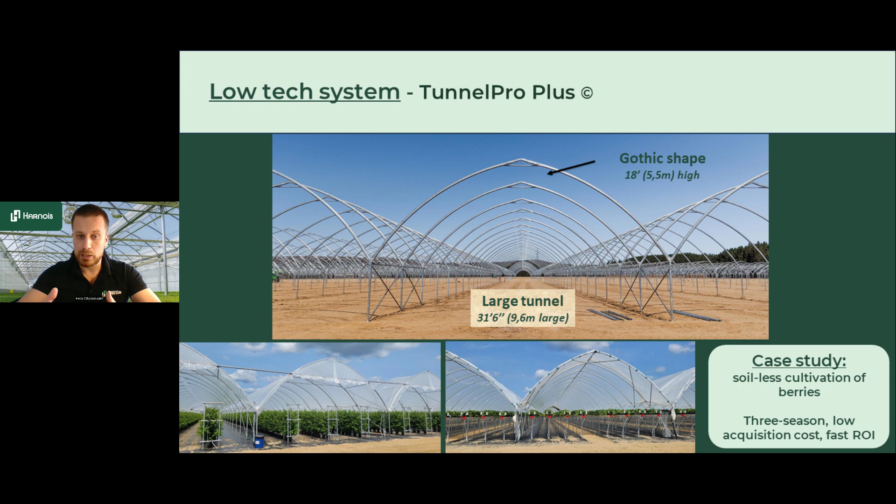Like you can see here, big width, gothic shape. I will explain why we use gothic shape. But at the end, what we see is mostly for soft fruit, but we see a lot of growers using high tunnel technology to be able to grow and improve, and also to use the geometry of the greenhouse to be more performant.

When I talk about geometry, what's very important to see, and you'll see it for each type of greenhouse today, is the air mass volume, what we call the buffer. This is important because without any technology or equipment, just the geometry and the air mass volume helped create a buffer. Keep in mind that hot air with humidity is less dense, so it rises passively. Having a pretty wide and pretty high greenhouse just helps physically keep climate uniformity at crop level. It's very simple, it's very low tech, but this helped a lot.

When I was working in Vietnam and Singapore, we were using very tall greenhouses with other technology, but just the type of greenhouse was helping a lot to have smoother variations and to keep the humidity and hot air more in the upper position, as you can see here, combined with passive ventilation.

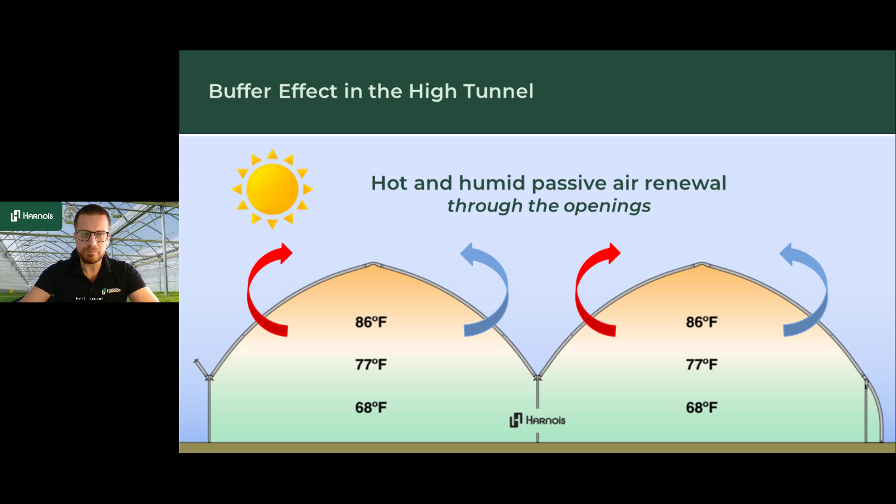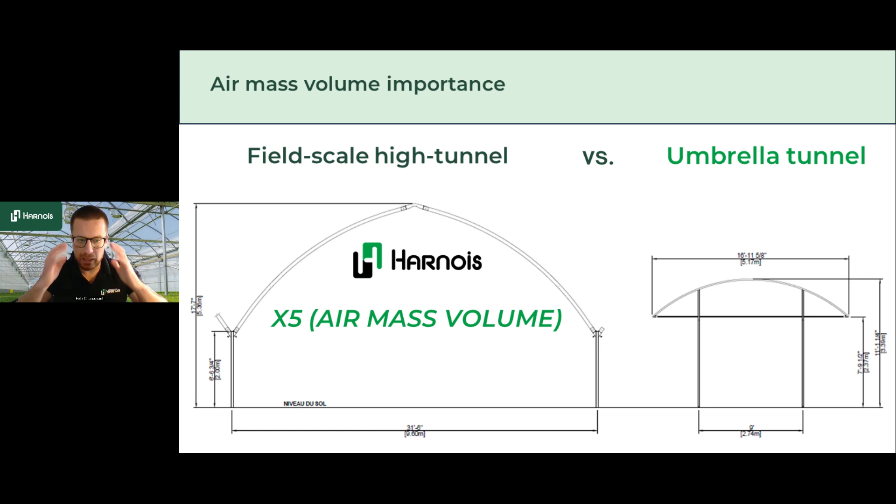So this is a first example of a lower tech system. Going back to the previous slide, you also see other types of tunnels, smaller mini tunnels, but like the one we designed here, which you'll see in the concrete case on the next slide, we wanted to have 5 times more air mass volume. This was one of our focus areas in engineering, because agronomic performance was directly correlated to the air mass volume. So let's go to a concrete example.

This is the first project we started last year. At the same time of year, the snow was starting to melt and they started construction. We started with the first phase with Pitre, which has about more than 300 acres of open field cultivation. It's a pretty young company, about 5-6 years in business, but very innovative.

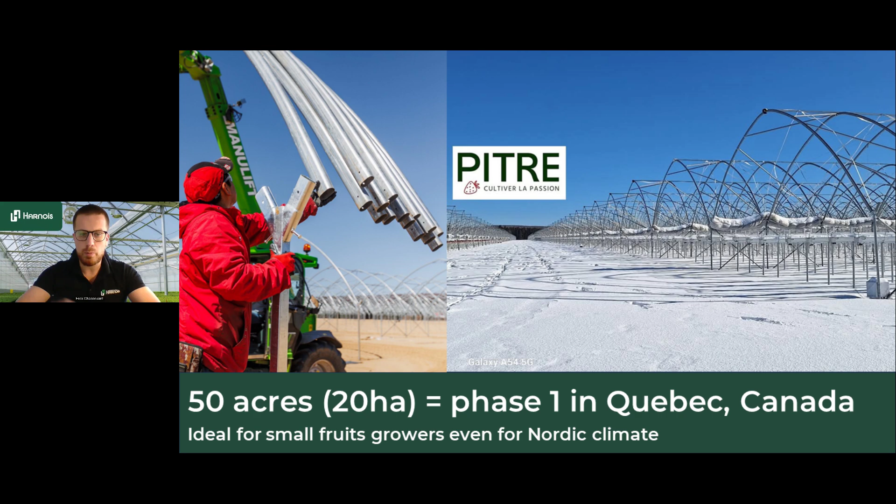They wanted to use a high tunnel to switch from open field cultivation to soilless growing method with drip irrigation, new technology, using our greenhouse to be much more resilient, starting 1 month before everyone using just the greenhouse effect, the volume, and the protection. Then by using innovative growing systems and innovative poly to play with UV for pollination, and also UV for the colors and conservation of the raspberries and strawberries. This is a concrete example of this lower tech trend.

And if you see on the next slide, it started to get big. This is just the first phase we completed last year.

We also work with suppliers with their own expertise, like Dubois, providing a very accurate, precise irrigation system because water is important. One of the main objectives of this is also to reduce inputs. Having a very precise drip irrigation system, the point is you also protect your crop and your fertilizer. When you have a very strong rain, for example, you reduce the risk of leaching. So this is very effective.

Even during a drought, when it's very hot, you can just open the poly. We have wide ventilation up to the ridge, protecting the crop because it can be very sensitive to hot air and humidity. So it's flexible, it's not high tech, but this helps. You'll see on the next slide it can double the yield, protect, and significantly reduce inputs. When I say inputs, I mean water, but also chemical application. So it's not chemical free.

The main goal is to be as organic as possible, but it's pretty hard with the berries. The main idea is to have a very good growing system so the plant can protect itself from fungus attack. For example, UV open poly can help reduce fungus contamination. The main idea of the system is also to use less chemicals and less fertilizer while increasing crop density and yield.

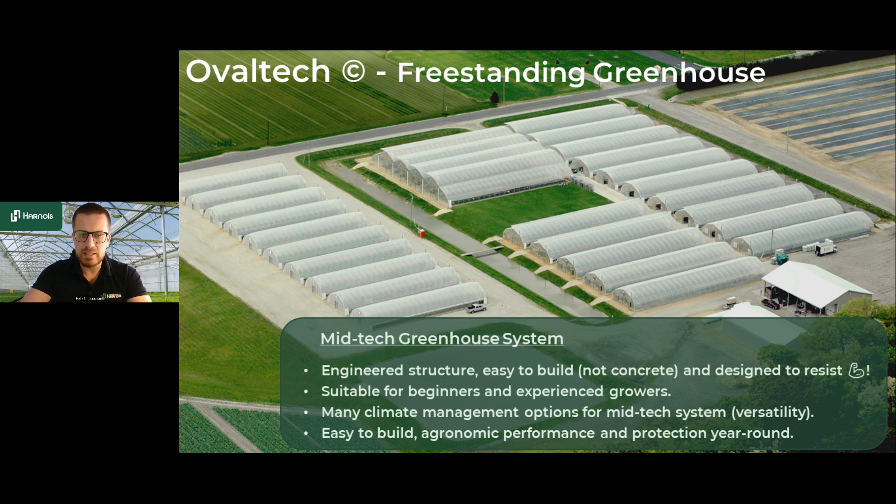The next slide shows a freestanding greenhouse, more of a mid-tech greenhouse system. Here in the pictures it's a complex of freestanding greenhouses, and we also have some gutter-connected ones on the top central. In short, a mid-tech greenhouse system involves more equipment integration and much more possibility to manage the climate with equipment—we start to talk about climate control systems, greenhouse control. So you'll see the differences, but this is the next step after the high tunnel, and then we go to mid-tech.

It's still the same regarding the buffer effect. I like to use this slide to show you, especially with freestanding greenhouses, that the volume is lower than a gutter-connected one, so you have to manage the hot temperatures in the air. That's why we use wider, taller greenhouses, especially for vine crops or cannabis, because they have very high photosynthetic activity and a lot of evapotranspiration. You need to be able to manage it, or you'll have issues with fungus and other contamination.

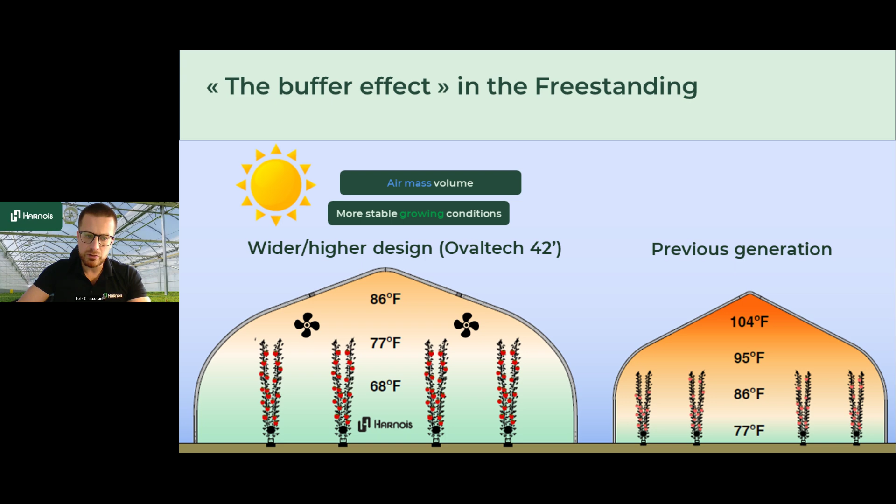Another slide to quickly show that we also consider this in our new generation of greenhouses—climate uniformity is very important. We want climate uniformity, less variation in temperature and humidity at crop level.

When we talk about mid-tech, we start to see more equipment: air circulation, HAF, VAF, irrigation—drip irrigation, sprinklers, irrigation booms, growing benches, soilless systems. We'll start to see more equipment, including motorized roll-up systems on the side and on top.

This type of greenhouse can be used year-round, unlike the lower tunnel I showed before—especially where we have snow, like in Canada's northeast, we need to uncover the high tunnel. Here it's designed to be much more insulated, enabling growers to grow year-round. The difference is we use only essential equipment. It's just another step regarding equipment in CEA.

But we can use it to grow many crops.

I will focus more on the mid-tech greenhouse system because it's more efficient, and also on the high tunnel. Here it's designed to be much more insulated and able to let growers grow year-round. So the difference is we use only essential equipment—it's just another step regarding equipment in CEA, but we can use it to grow many crops.

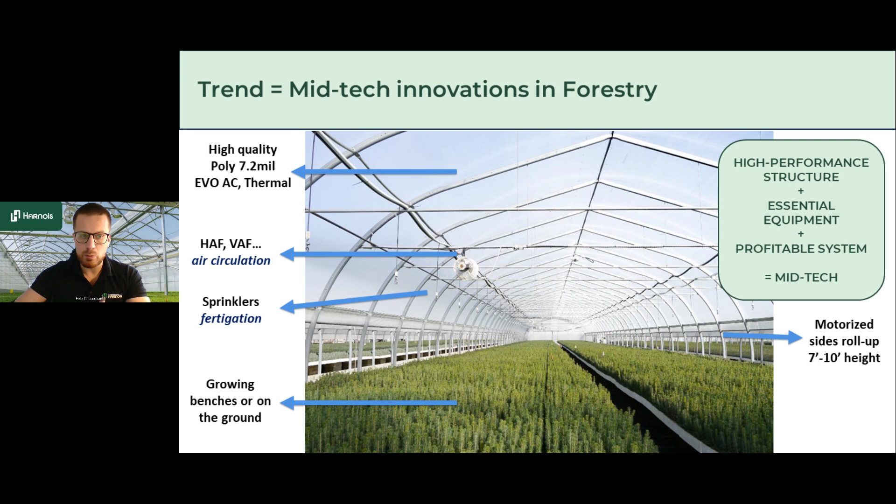In this example, CEA is sometimes thought of as more for fruit and vegetables, but I like to also include crops like tree seedlings, because in Canada we see a lot of requests for more automation and mid-tech systems for young tree seedlings.

So this is an example of a project we are building right now, but it will be finished next month. What you see here is a gutter connected system. We have two main growing areas, and we use part of the greenhouse for a technical area where we put technologies like the seedling machine with Ellepot. Biotherm, a Californian company, is also here working on the hot water heating system on the ground.

I like to use this example because before, when they were using the greenhouse, it was more low tech. And what we see, and the request from the growers, is the struggle with labor, the struggle with tree seedling germination loss and young tree loss. So they wanted solutions.

They cannot have good laborers as before, and they have to grow more because in Canada, in Quebec and here in the Maritimes - this project is with the government, with the province - there is a deficit of young tree seedlings. So they wanted to use a technology, not fully high tech, but a mid tech solution, to be much more efficient and answer the need to grow more.

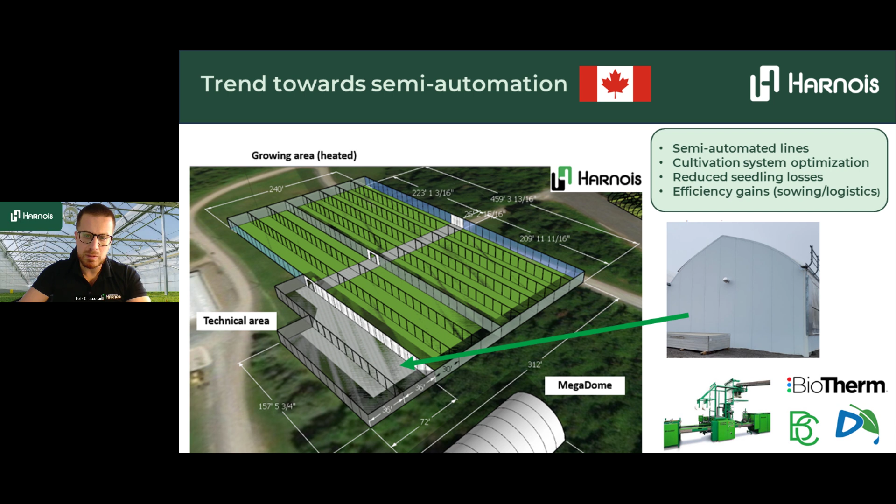So you see here we start to use semi-automated lines, cultivation system optimization, to have gains and to be more productive.

To be more productive, we work with partners, and here we work a lot with Blackmore companies, and they use air trays. It's a simple technology, but it looks simple while actually being quite complex, because it has to be scalable, and it has to be easy for forklifts and systems to manipulate inside the greenhouse.

With this system, it's easier to move the trays because everything is grown in trays, so you need less labor. It's also more efficient to place. And from the agronomic standpoint, it helped develop better roots and decrease the loss of tree seedlings.

So it's a solution helping first with manipulation, logistics, and operational efficiency, and from the agronomic standpoint, you get more consistency and better trees. The main idea is one seedling equals one tree, better root development, and moving the plants to the people, not the people to the plants.

Instead of adding new processes, the main idea was to simplify and use a mid-tech system, because we still have people handling things. We have transplantation lines, but we still use people to drive the lift. Just this helps a lot with overall nursery efficiency.

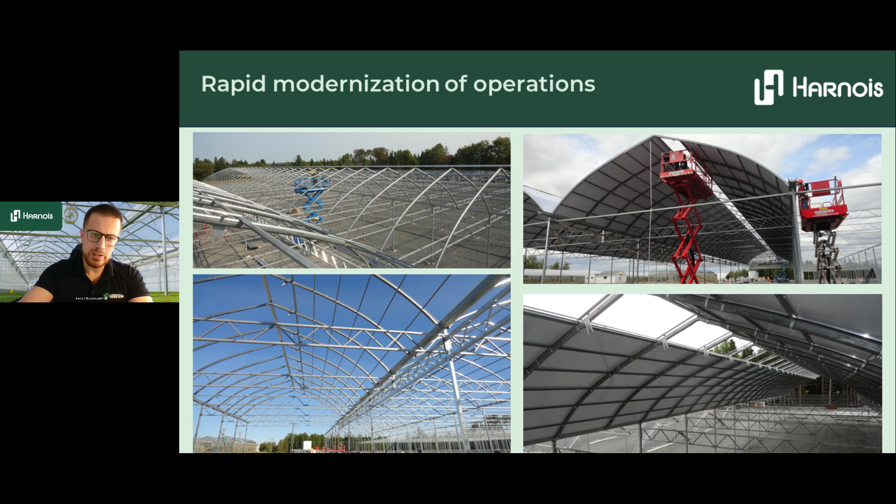So this is an example of a mid-tech system: passive ventilation, shading screen, thermal - basic equipment, I would say. But we start to see climate control technologies and a first level of semi-automation.

Another project I like is this one in Guatemala. We were working with leafy greens growers. Leafy greens in Guatemala, if you are in the highlands, the climate is great - colder at night, not too hot during the day. So you do not need a lot of complexity.

They were growing in the beginning using timber greenhouses. It was working - this is how they scaled up, starting with the first block, making mistakes, and then improving.

But what we found with this client is that in order to get more consistency and uniformity on the yield, especially on the lettuce weight, it was very important to first use a hydroponic system, and to have the right climate and the right use of equipment, the volume of the greenhouse, the orientation - without spending too much money.

Because here labor is easy to find, they don't need any heating system, and they don't have a lot of pest pressure. So in the mountains, the location is ideal. But they just wanted us to help protect the crop, have uniformity, and scale up, because when you work with big supermarkets, they want every time the same - 150 grams per head of lettuce.

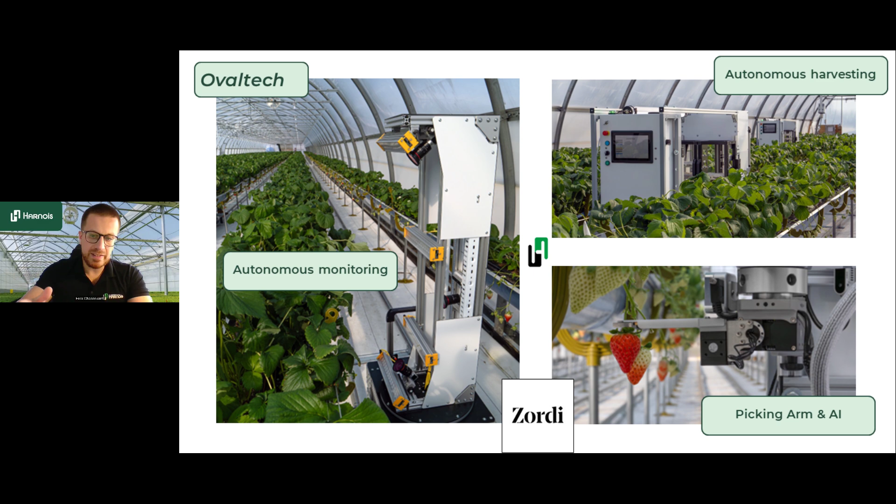Right now, if you check the top right, this robot can pick about 300 strawberries per hour. That's a good number, but they're working very hard to be quicker, and to make this technology affordable for growers and new people to be able to access it.

Another example, some more detail, but it's auto-grow mode, driven by data. This is why I like to use this technology, because it's more high tech - the latest technology is there, like artificial intelligence. They work with NVIDIA on low cost cameras. Low cost is important because they don't want technology only one or two growers in the state or Canada can afford.

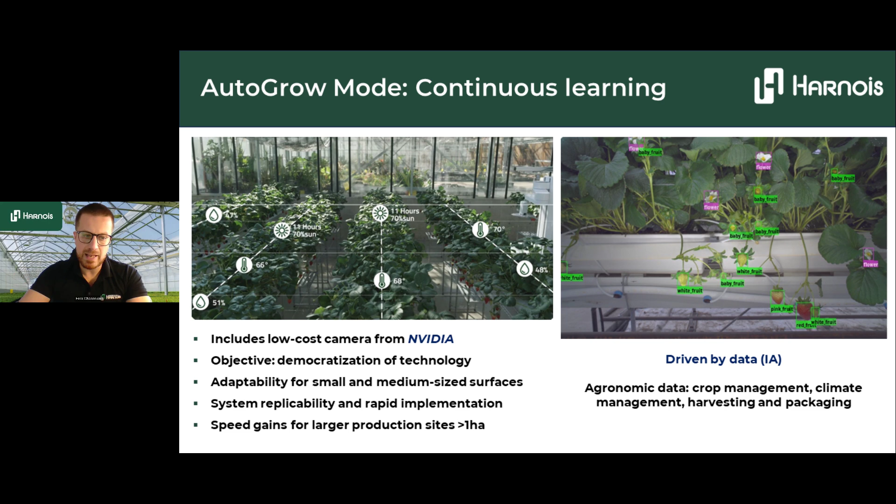So the idea is to be able to have scalability and to have this technology, real technology access with mid-tech greenhouses, and to work on the system replicability. We are just doing more projects right now. They want to scale up to use more greenhouses, more robots. So it's very exciting, and I like to use this example as a good transition.

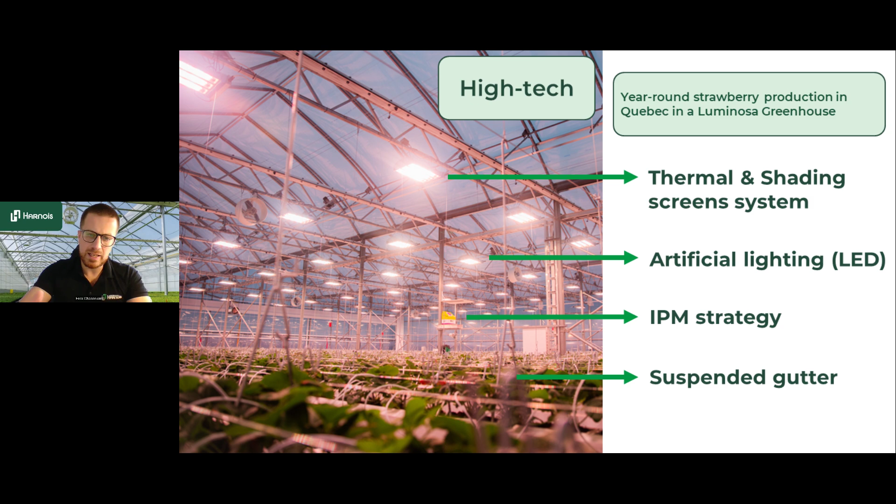Another project we are doing in Canada, but still higher tech. And when I say high tech, you start to see more complexity, more technologies regarding the artificial lighting system. This one is in Quebec. We work with Hort Americas on the lighting, and it's one of the most productive - not a big project, but one of the most productive strawberry cultivation year-round in Canada.

So they produce very delicious strawberries, hybrids, very good quality, with the gutter connected technology and the use of LED lighting. We see also more and more dynamic spectrum technologies.

So I am pretty good on time. The next example, I will say the very high tech, one of the most innovative greenhouse systems and greenhouse projects I will talk about right now.

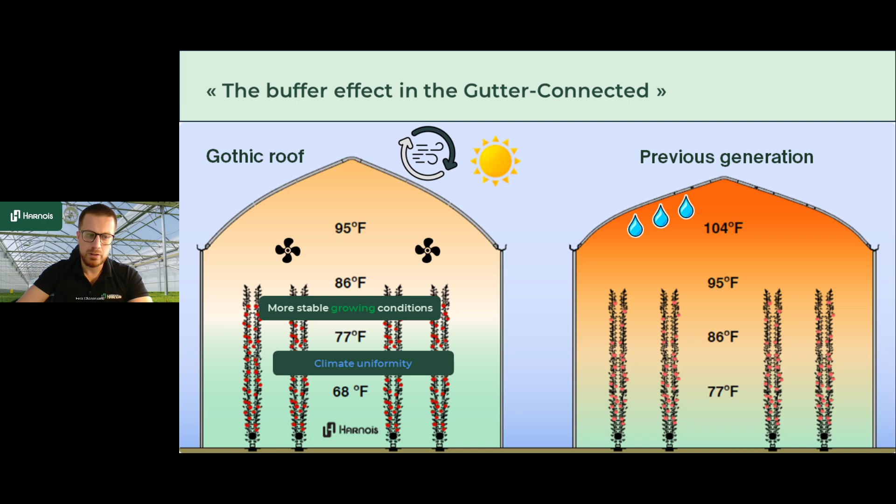So if I go back to the glass house, it's the trend, and what we see - we are seeing it in Mexico for years. In Mexico, it's 50 feet wide, 23 feet high, more than 6 meters high. So in the Vermax, we see it even in Nordic climate, and this is the first point, to be able to grow, and then we integrate the higher tech equipment.

So we do strata-based climate management, micro management of the growing zone. So this project is for leafy greens.

So leafy greens, it's evolutive, especially when you use a mobile gully system. So while the lettuce grows from post-germination to the final mature stage, the light level, the climate, everything will adapt. So this is what we are doing here.

So it's smart lighting pattern, more efficient misting system, the climate control. We work with the VPD diff directly - the air exchange, but directly close to the leaf. So I will explain it on the next slide, but it's much more accurate, much more precise than a lower tech or mid-tech system.

Insect-proof mesh can be removed. Of course, it's more like also semi-closed, positive pressure, or fully sealed. So this type of system is more connected and integrates a higher level of equipment.

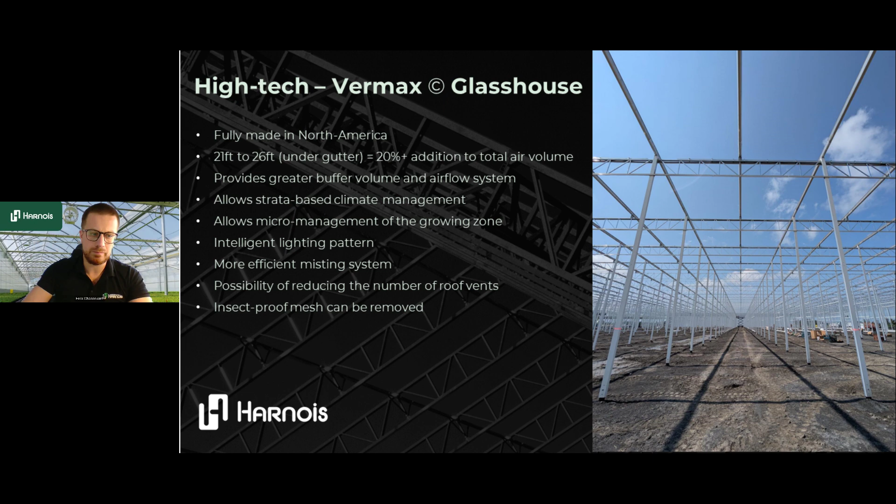So when I talk about mobile GUI systems, this is the same as we're doing in Guatemala. I did not mention the company, but we work with American Hydroponics. It's a fixed NFT. We're also working on maybe a new project with MGS, which is mobile gully system.

So the gullies are moving. It's pretty simple. They move, so you grow, you transplant from one side and you collect, and you can do like a loop.

But then with green automation on this system we work, it's higher tech. So we work on conveyors, transplantation, many technologies to be able to be as automated as possible, consistent with the right climate uniformity.

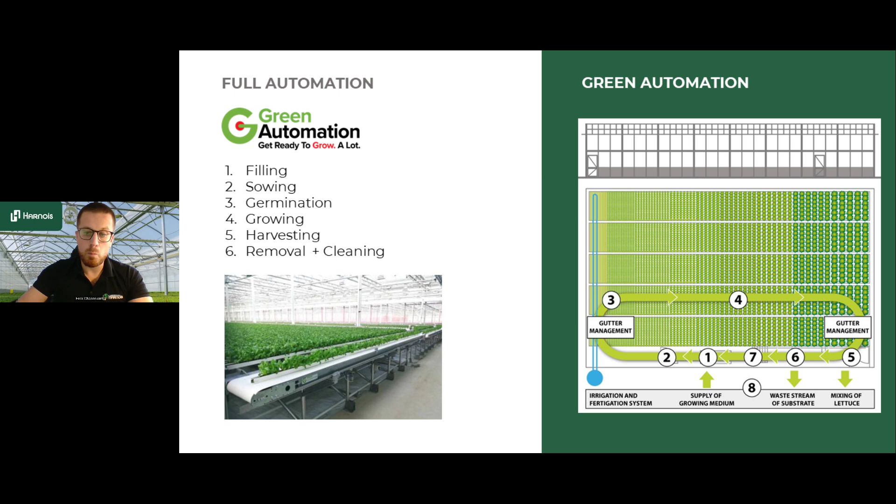But the climate uniformity is per growing stage. So the plant will not receive the same amount of light in the beginning compared to the end. Everything is adaptable to the plant physiology.

But when we see it, it's becoming more high tech. The point here, we play on details. This very precise level of technology and the possibility to be able to play with the data, to create a model, and based on this model, to boost it with artificial intelligence and deep learning, this is like the next step.

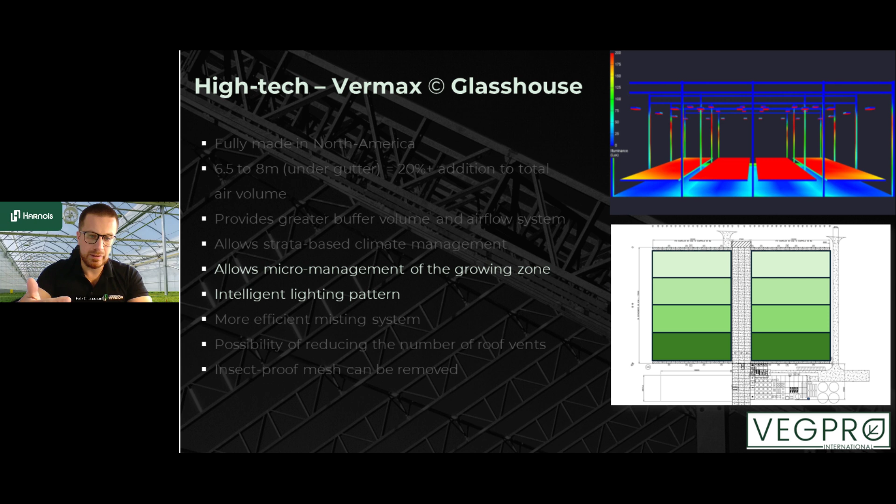So this is why we talk about a very high-tech system, but it's very precise, precise on where the plant is and how the plants do the photosynthesis, and just the plant activity.

Water is also very important. We'll not go in detail here, but what you need to retain is we work a lot for the water hydroponic system. We have the possibility to recycle the water, to treat the water, and to be able to use the greenhouse to collect the water to feed the system, the freshwater tank. This is very important.

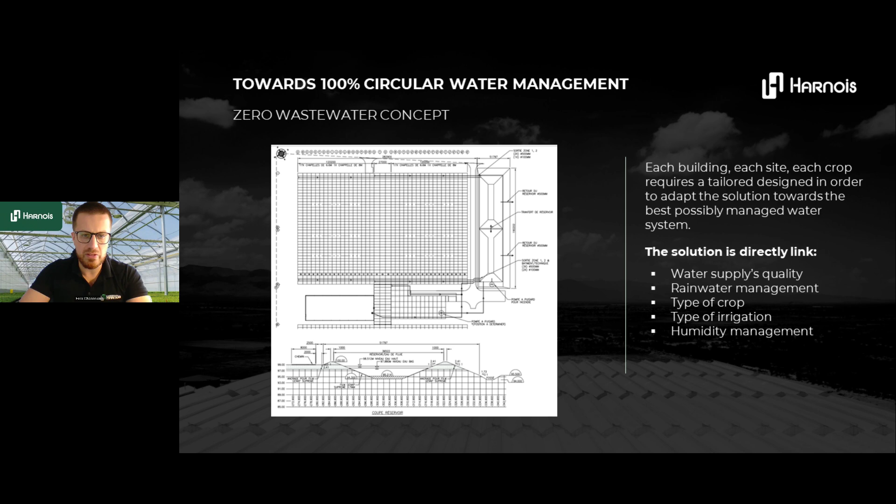Regarding the technology, we work with the company Hogendoorn on this one. And when I talk about VPDiff, it's the actual leaf temperature measurement. So we use a captor directly, a system to be able to work as close as a leaf, to measure the gas exchange and directly the VPD by the VPDiff.

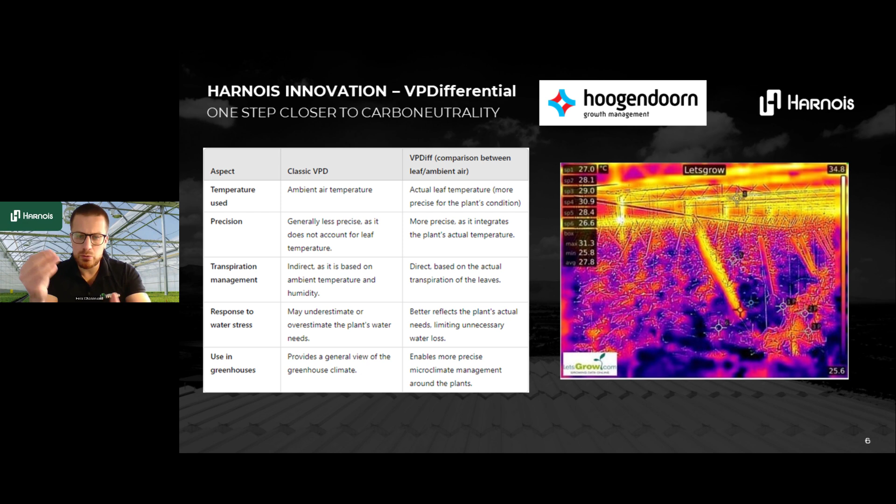So when we talk about climate uniformity, climate optimization, with this type of technology, you know everything about the plant, and you can also anticipate the plant's next chemical actions by use of nutrients, use of photons of light to build your system.

This is why we are talking more about carbon neutral technology, zero net greenhouse. This is where the latest, finest innovation will help growers be able to grow and have the perfect climate, but also be very efficient regarding input intakes. When we talk about fertilizer, chemical energy, if you have good yield and can control very precisely and reduce your inputs, this is how you are very profitable and make money. So this new type of greenhouse system with this patented technology by Harnois is very innovative.

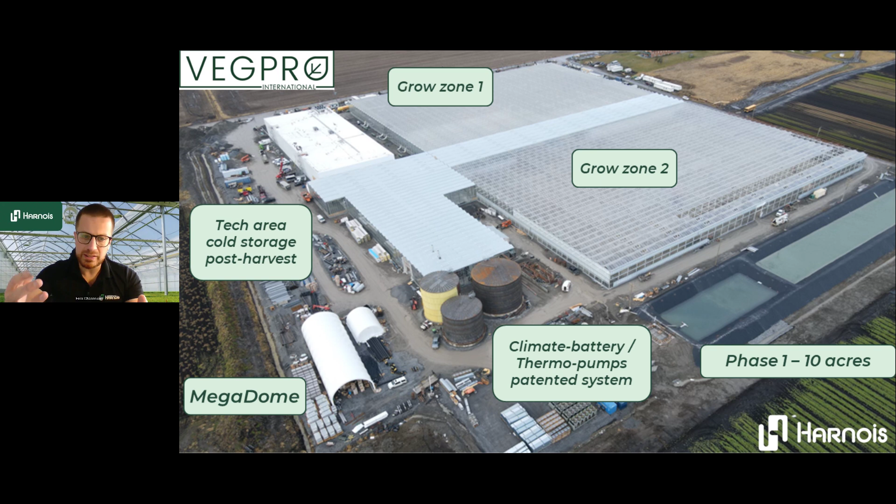But not all growers, of course, can access this technology. So this is why, from low to mid to higher tech, we have solutions according to the location, the budget, and the size of the project.

And this is where our expertise comes in. We have agronomists, equipment experts, many specialists. We work with suppliers. So here I named a few suppliers, but some of the suppliers work a lot here in North America, and we work with many suppliers, many experts.

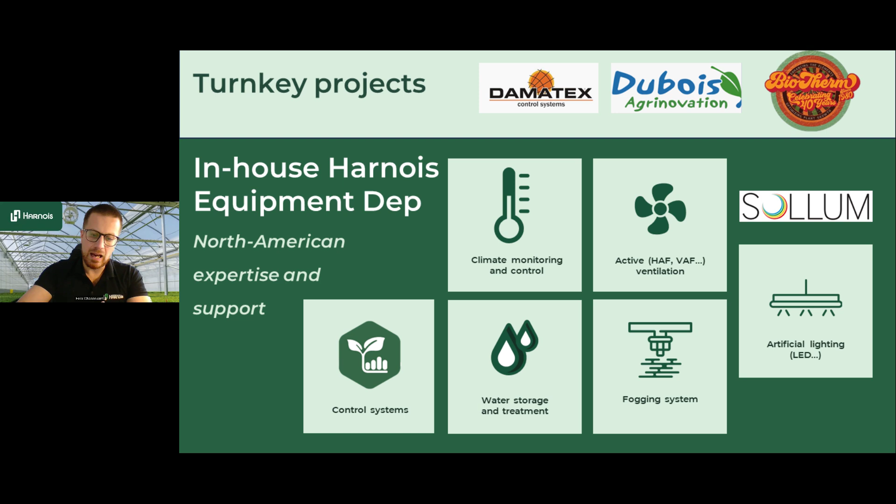But we have expertise, and the most important thing is to understand where the grower is, where the people who want to invest are, design the solution, support, and then have the possibility to upgrade over time. And this is another example of a project.

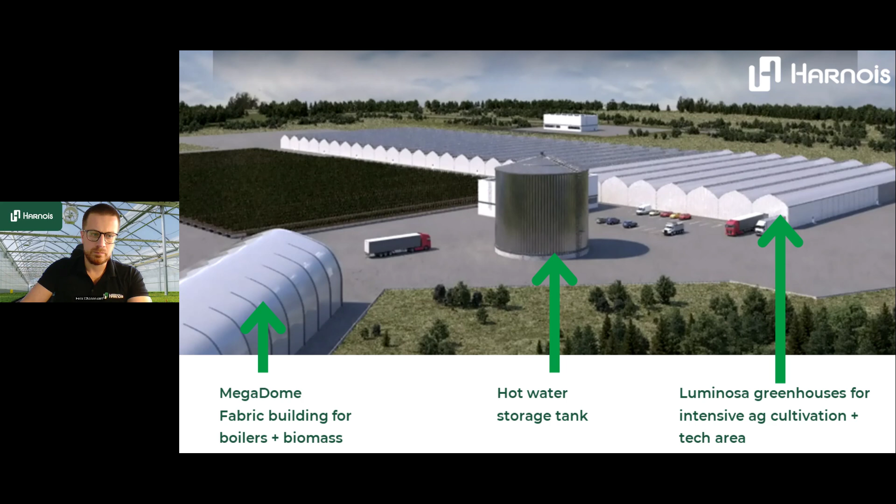So I am about to end here. Why Harnois? Like I told you, the light, how we design the structure first to have the best of the buffer effect, the best of the light efficiency, the passive, our expertise, the return on investment.

So that's very important to discuss with the growers where you want to be in 5 years. Based on that, we anticipate the needs and we can give the best advice to create a long-term relation.

It's a fusion of the designs, installations, the service. Project management is key, so we also have a project management department working very closely with the equipment department, with the growers, of course, and the suppliers. I just named a few.

But this is all this expertise and this knowledge transfer. At the end, it's about helping the growers to be the best and to be able to reach their goal.

And my last slide, in conclusion, we have a large choice of greenhouse systems, as you have seen. So we are very diverse, not only in the location we work, but also the technology we have, from high tunnel to glass house, with freestanding gutter connected, and many innovations are coming.

So we try to stay innovative, to learn from the growers. I love this job, I can tell you, because every time I meet the growers, I am learning. And I'm still pretty young, but I am learning a lot.